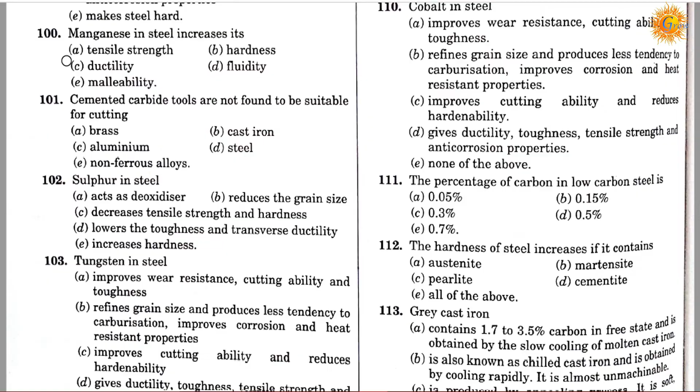Cemented carbide tools are not found to be suitable for cutting. Option A, brass. Option B, cast iron. Option C, aluminium. Option D, steel. Option E, non-ferrous alloys. Correct answer is D. Cemented carbide tools are not found to be suitable for cutting steel.

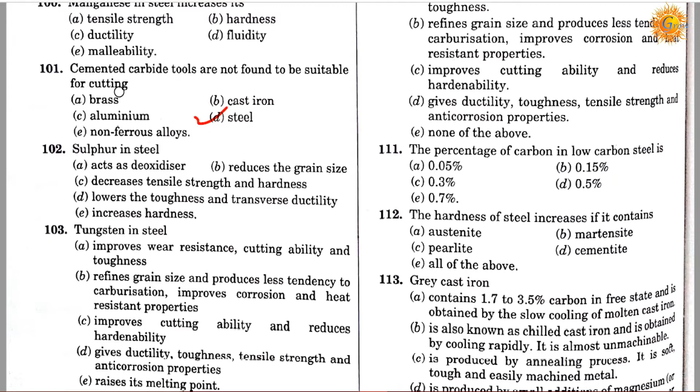Question number 102. Sulfur in steel. Option A acts as a deoxidizer. Option B reduces the grain size. Option C decreases tensile strength and hardness. Option D lowers the toughness and transverse ductility. Option E increases the hardness. Correct answer is D. Sulfur in steel will lower the toughness and transverse ductility.

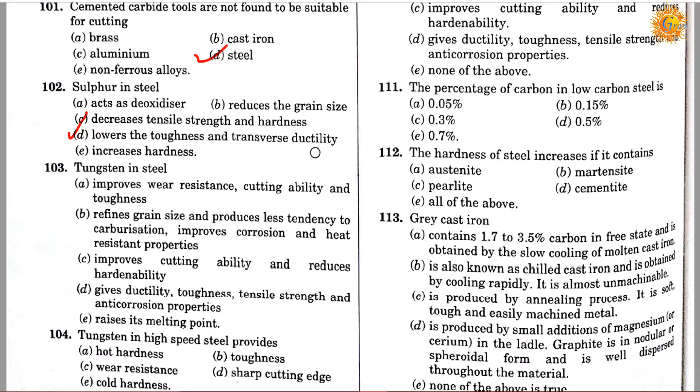Question number 103. Tungsten in steel. Option A improves wear resistance, cutting ability and toughness. Option B refines grain size, reduces tendency to carburization, improves corrosion and heat resistance properties. Option C improves cutting ability and reduces hardenability. Option D gives ductility, toughness, tensile strength and anti-corrosion properties. Option E raises its melting point. Correct answer is B. Tungsten in steel will refine grain size and produce less tendency to carburization, and improves corrosion and heat resistance properties.

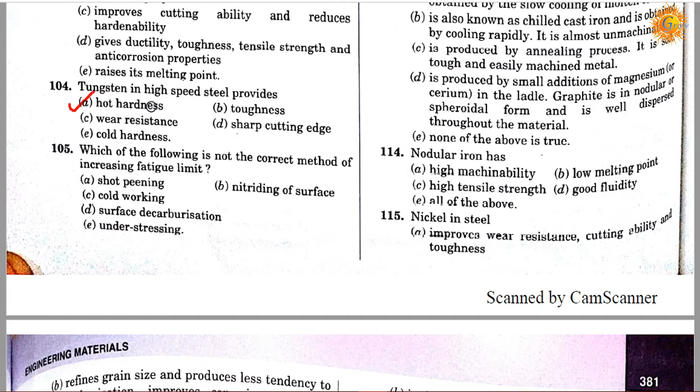Question number 104. Tungsten in high speed steel provides. Option A hot hardness. Option B toughness. Option C wear resistance. Option D sharp cutting edges. Option E cold hardness. Correct answer is A. Tungsten in high speed steel provides hot hardness.

Question number 105. Which of the following is not the correct method of increasing fatigue limit? Option A is shot peening. Option B is nitriding of surface. Option C is cold working. Option D is surface decarburization. Option E is under stressing. Correct answer is D.

It means which of the following is not the correct method to increase the fatigue limit. So surface decarburization is not a good method to increase the fatigue limit.

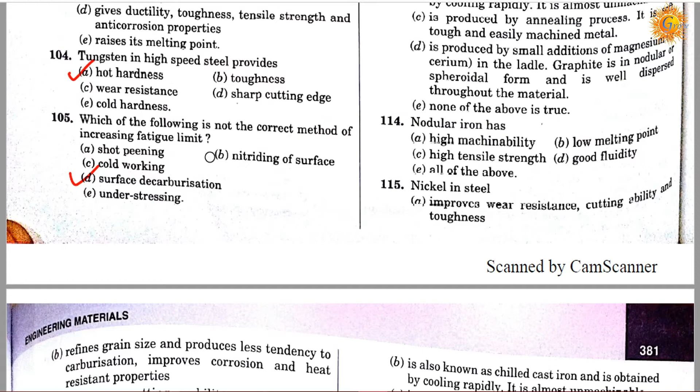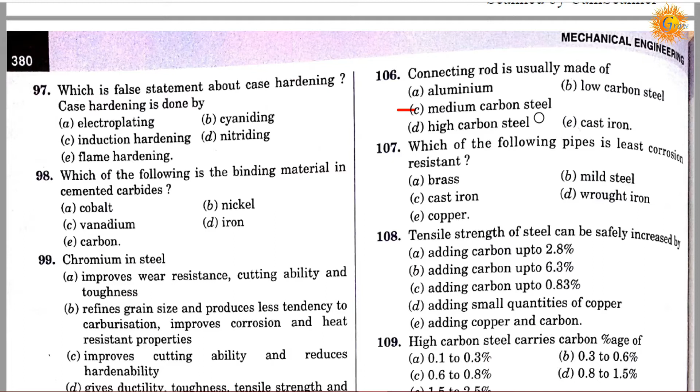Question number 107. Which of the following pipes has the least corrosion resistance? Option A is brass. Option B is mild steel. Option C is cast iron. Option D is wrought iron. Option E is copper. Correct answer is D. Which of the following pipes is the least corrosion resistant? So the wrought iron pipes have the least corrosion resistance.

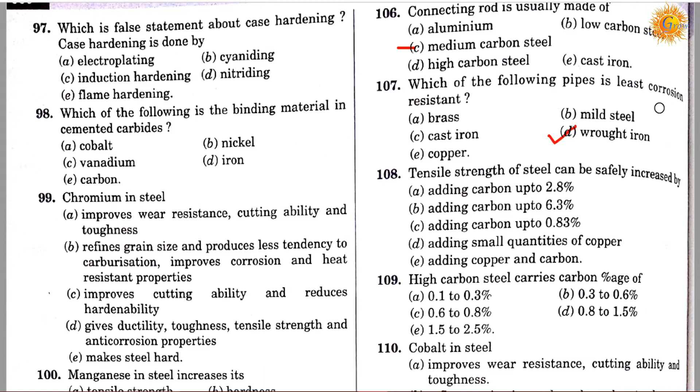Question number 108. Tensile strength of steel can be safely increased by: option A, adding carbon up to 2.8%; option B, adding carbon up to 6.3%; option C, adding carbon up to 0.83%; option D, adding a small quantity of copper; option E, adding copper and carbon. Correct answer is C.

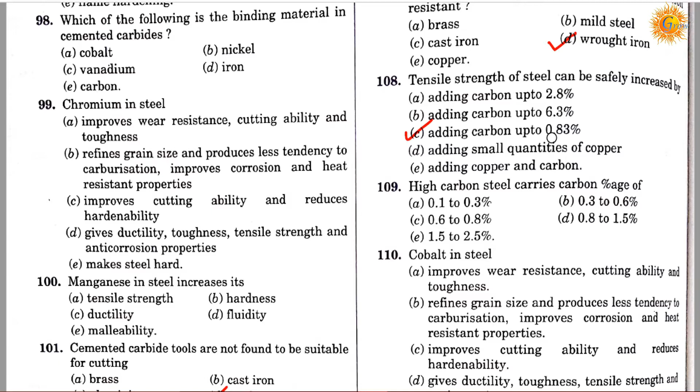Question number 109. High carbon steel carries carbon percentage of: option A, 0.1 to 0.3%; option B, 0.3 to 0.6%; option C, 0.6 to 0.8%; option D, 0.8 to 1.5%; option E, 1.5 to 2.5%. Correct answer is D. High carbon steel carries carbon percentage of 0.8 to 1.5%.

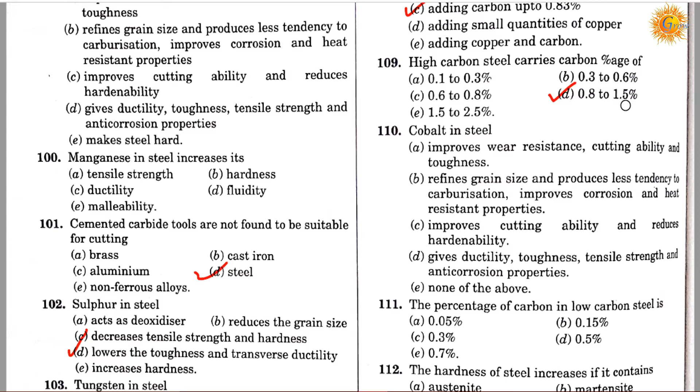Question number 110. Cobalt in steel will: option A, improve wear resistance, cutting ability and toughness; option B, refine grain size and produce less tendency to carburization, improve corrosion and heat resistance properties; option C, improve cutting ability and reduce hardenability; option D, give ductility, toughness, tensile strength and anti-corrosion properties; option E, none of the above. Correct answer is C. Cobalt in steel will improve cutting ability and reduce hardenability.

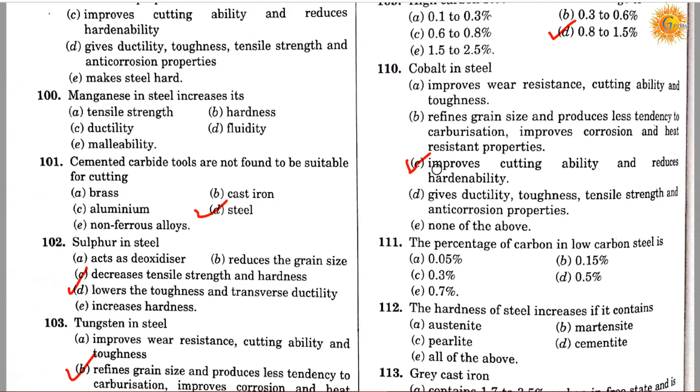Question number 111. The percentage of carbon in low carbon steel is: option A, 0.05%; option B, 0.15%; option C, 0.3%; option D, 0.5%; option E, 0.7%. Correct answer is B. The percentage of carbon in low carbon steel is 0.15%.

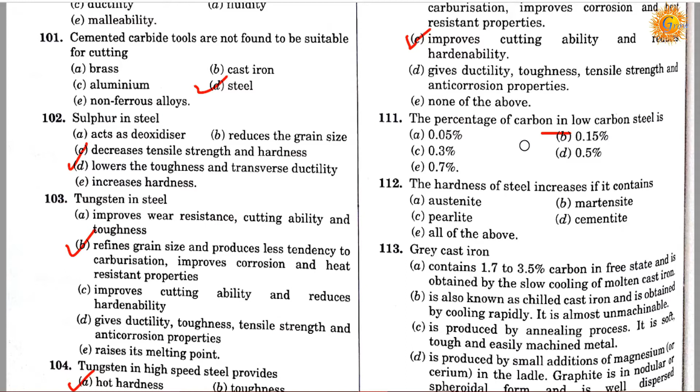Question number 112. The hardness of steel increases if it contains: option A, austenite; option B, martensite; option C, pearlite; option D, cementite; option E, all of the above. Correct answer is B. The hardness of steel increases if it contains martensite.

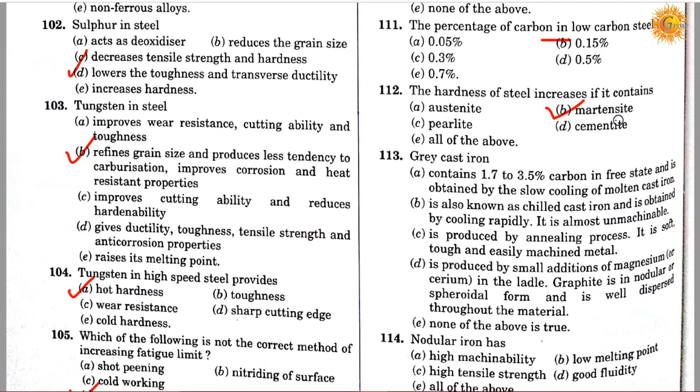Question number 113. Grey cast iron: option A, it contains 1.7 to 3.5% carbon in free state and is obtained by slow cooling of molten cast iron; option B, also known as chilled cast iron, obtained by cooling rapidly, it is almost unmachinable; option C, produced by the annealing process, it is a soft, tough and easily machined metal; option D, produced by small addition of magnesium or cerium in the ladle, and graphite is in nodular or spheroidal form and is well dispersed throughout the material; option E, none of the above is true.

Correct answer is A. Grey cast iron contains 1.7 to 3.5% of carbon in free state and is obtained by the slow cooling of the molten cast iron.

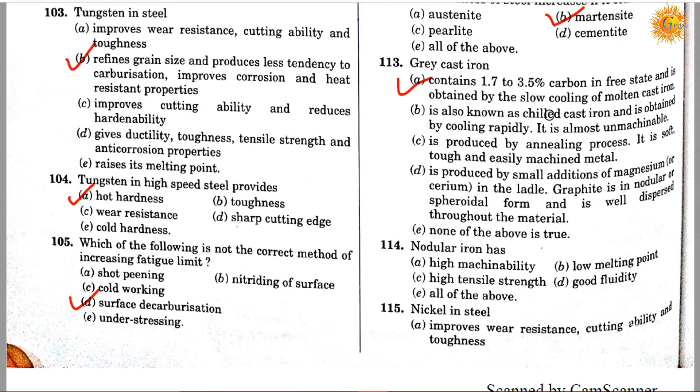Question 114. Nodular iron has: A) high machinability, B) low melting point, C) high tensile strength, D) good fluidity, E) all of the above. Correct answer is E. Nodular iron has high machinability, low melting point, high tensile strength, and good fluidity.

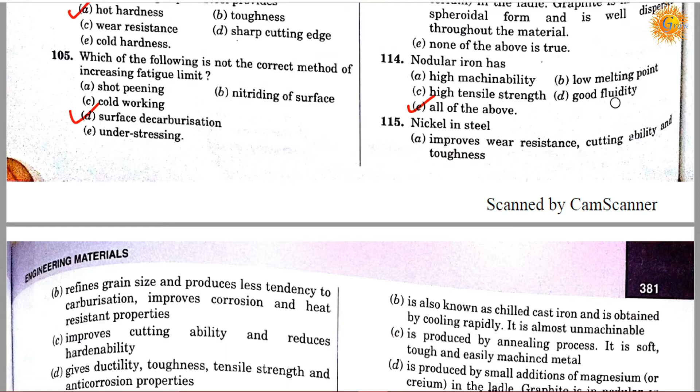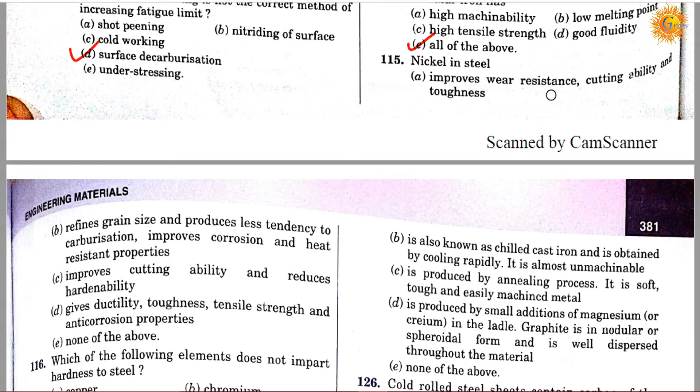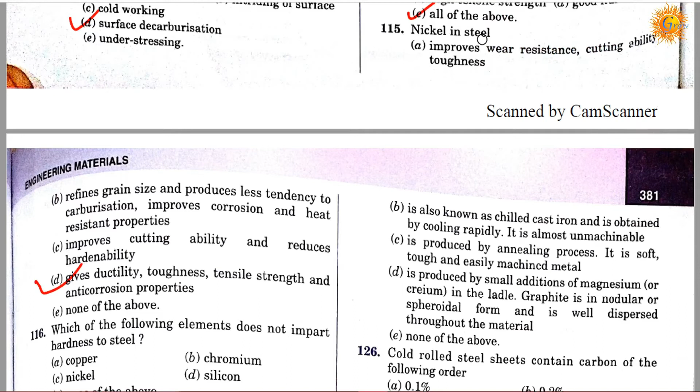Question 115. Nickel in steel will: A) improves wear resistance, cutting ability and toughness. B) refines grain size and produces less tendency to carburization, improves corrosion and heat resistance properties. C) improves cutting ability and reduces hardenability. D) gives ductility, toughness, tensile strength, and anti-corrosion properties. E) none of the above. Correct answer is D. Nickel in steel gives ductility, toughness, tensile strength, and anti-corrosion properties.

Question 116. Which of the following elements does not impart hardness to steel? A) copper, B) chromium, C) nickel, D) silicon, E) none of the above. Correct answer is A, copper, which does not impart hardness to steel.

Question 117. The presence of sulfur in pig iron makes: A) it easily machinable, B) it brittle, C) it hard, D) the casting unsound, E) increases the fluidity. Correct answer is D. The presence of sulfur in pig iron makes the casting unsound.

Question 118. Melting point of iron is: A) 1539 degrees centigrade, B) 1601 degrees centigrade, C) 1489 degrees centigrade, D) 1712 degrees centigrade, E) 1131 degrees centigrade. Correct answer is A. Melting point of iron is 1539 degrees centigrade.

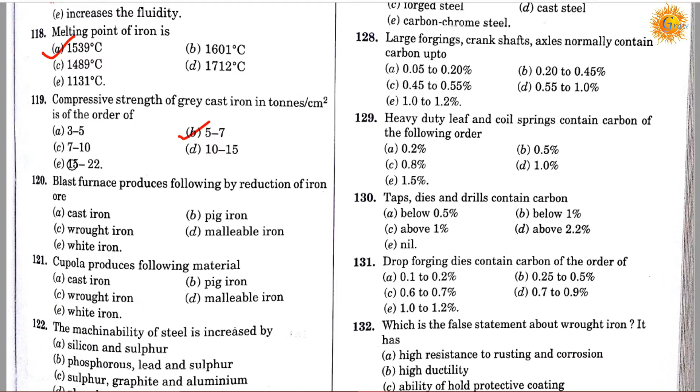Question 120. Blast furnace produces the following by reduction of iron ore: A) cast iron, B) pig iron, C) wrought iron, D) malleable iron, E) white iron. Correct answer is B. Blast furnace produces pig iron by reduction of iron ore.

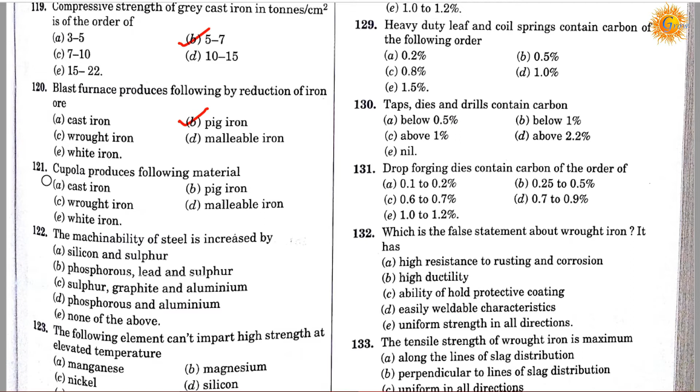Question 121. Does a cupola produce the following material? A) cast iron, B) pig iron, C) wrought iron, D) malleable iron, E) white iron. Correct answer is A, cast iron. Cupola produces cast iron.

Question 122. The machinability of steel is increased by: A) silicon and sulfur, B) phosphorus, lead and sulfur, C) sulfur, graphite and aluminium, D) phosphorus and aluminium, E) none of the above. Correct answer is B. Machinability of steel is increased by phosphorus, lead and sulfur.

Question 123. Which of the following elements can't impart high strength at elevated temperature? A) manganese, B) magnesium, C) nickel, D) silicon, E) none of the above. Correct answer is B. Magnesium can't impart high strength at elevated temperature.

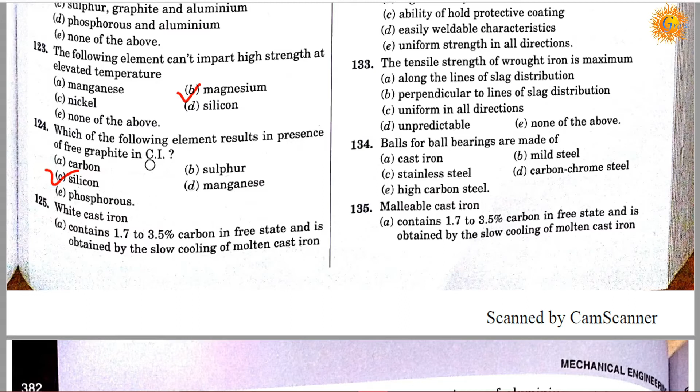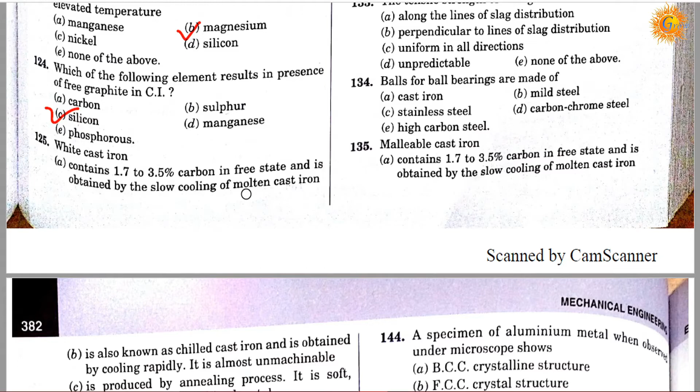Question 125. White cast iron has: A) contains 1.7 to 3.5% of carbon in free state and is obtained by slow cooling of molten cast iron. B) also known as chilled cast iron, obtained by cooling rapidly, it is almost unmachinable. C) produced by annealing process, it is a soft, tough and easily machined metal. D) produced by small addition of magnesium or cerium in the ladle, graphite is in nodular or spheroid form and is well dispersed throughout the material. E) none of the above. Correct answer is B.

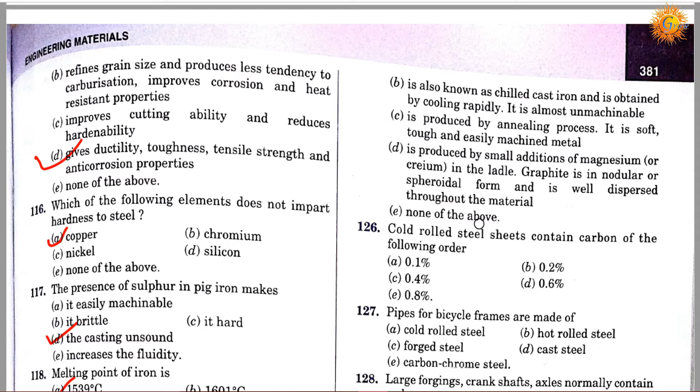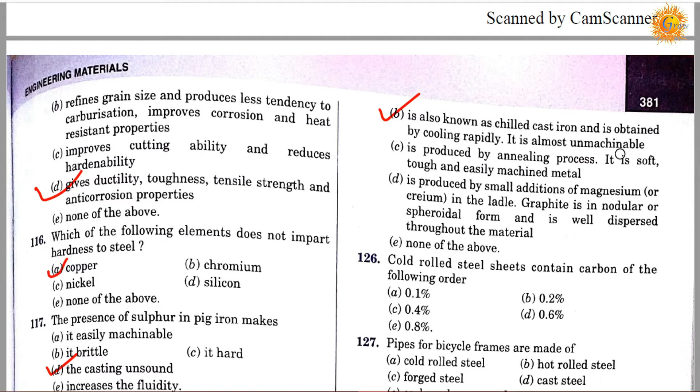So white cast iron is the one which is also known as chilled cast iron, and is obtained by cooling rapidly. It is almost unmachinable.

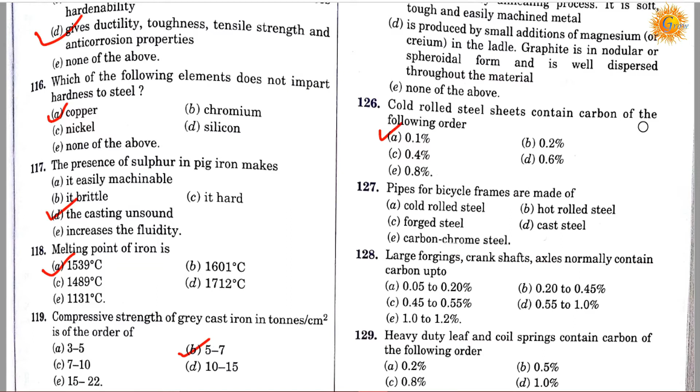Question number 126. Cold rolled steel sheets contain carbon of the following order: option A 0.1%, option B 0.2%, option C 0.4%, option D 0.6%, option E 0.8%. Correct answer is A. Cold rolled steel sheets contain carbon of 0.1%.

Question number 127. Pipes for bicycle frames are made of: option A cold rolled steel, option B hot rolled steel, option C forged steel, option D cast steel, option E carbon chrome steel. Correct answer is A. Pipes for bicycle frames are made of cold rolled steel.

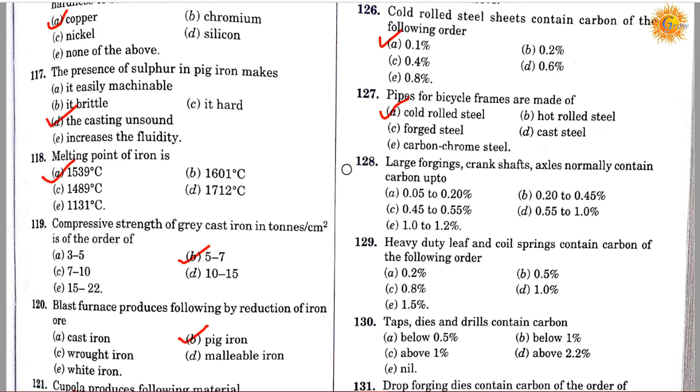Question number 128. Large forgings like crankshafts, axles normally contain carbon up to: option A 0.05 to 0.20%, option B 0.20 to 0.45%, option C 0.45 to 0.55%, option D 0.55 to 1%, option E 1 to 1.2%. Correct answer is C. Large forgings, crankshafts, axles normally contain carbon up to 0.45 to 0.55%.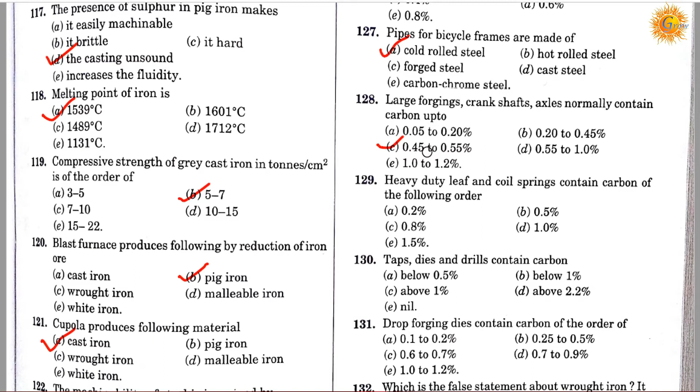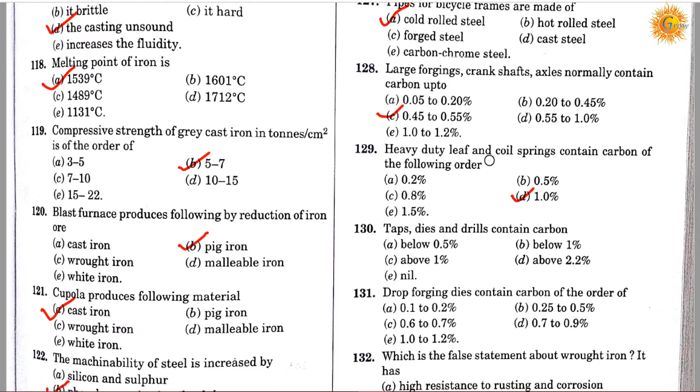Question number 129. Heavy duty leaf and coil springs contain carbon of the following order: option A 0.2%, option B 0.5%, option C 0.8%, option D 1%, option E 1.5%. Correct answer is D, it will be 1%. Heavy duty leaf and coil springs contain carbon of 1%.

Question number 130. Taps, dies and drills contain carbon: option A below 0.5%, option B below 1%, option C above 1%, option D above 2.2%, option E is nil. Correct answer is A, it will be above 1%.

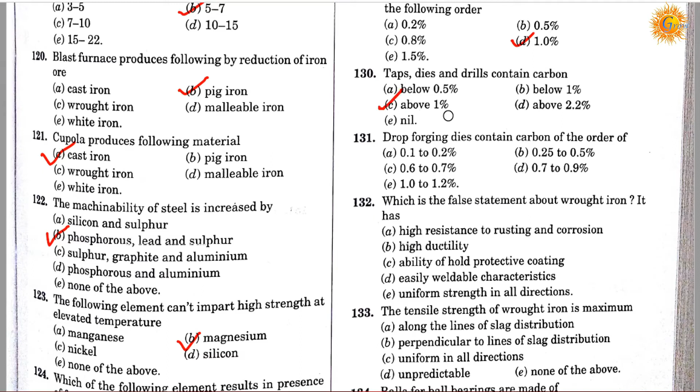Question number 131. The drop forging dies contain carbon of the order of: option A 0.1 to 0.2%, option B 0.25 to 0.5%, option C 0.6 to 0.7%, option D 0.7 to 0.9%, option E 1% to 1.2%. Correct answer is A. Drop forging dies contain carbon of the order of 0.6 to 0.7%.

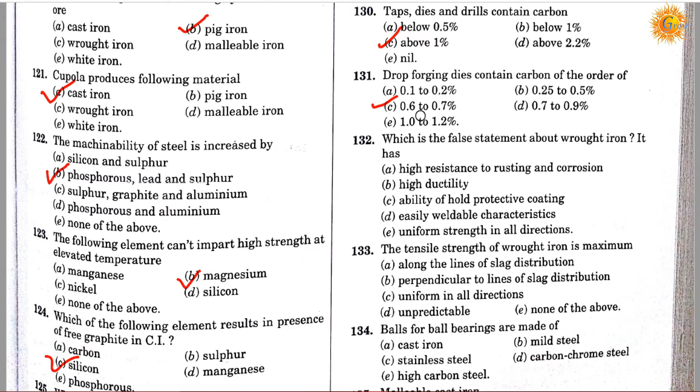Question number 132. Which is the false statement about wrought iron? It has: option A high resistance to rusting and corrosion, option B high ductility, option C the ability to hold protective coatings, option D easily weldable characteristics, and option E uniform strength in all directions. Correct answer is E, which is the false statement about wrought iron. It has uniform strength in all directions - that is the false statement.

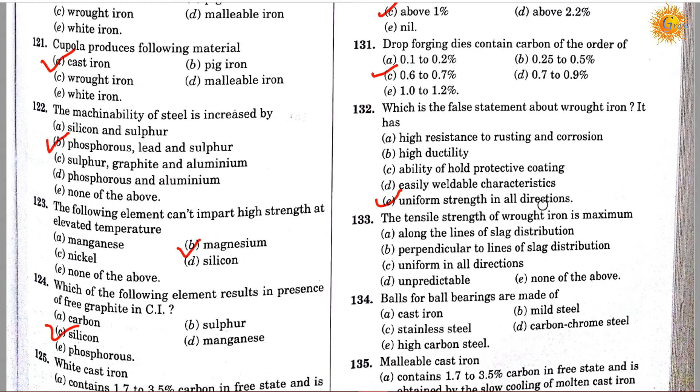Question number 133. The tensile strength of wrought iron is maximum: option A along the lines of slag distribution, option B perpendicular to lines of slag distribution, option C uniform in all directions, option D unpredictable, option E none of the above. Correct answer is A. The tensile strength of wrought iron is maximum along the lines of slag distribution.

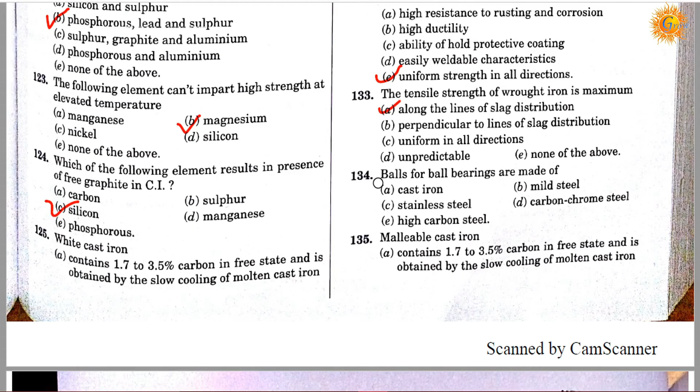Question number 134. Balls for ball bearings are made of: option A cast iron, option B mild steel, option C stainless steel, option D carbon chrome steel, and option E high carbon steel. Correct answer is D, it's made of carbon chrome steel.

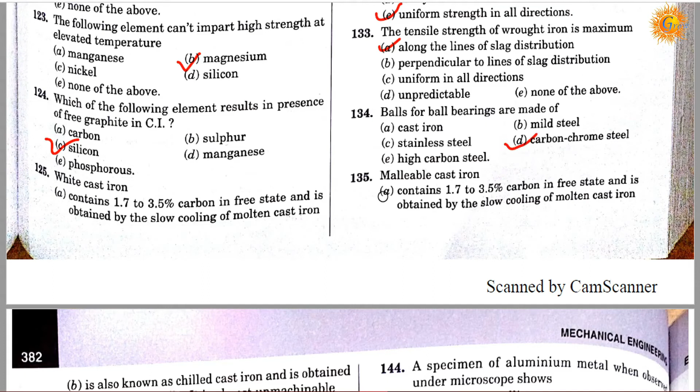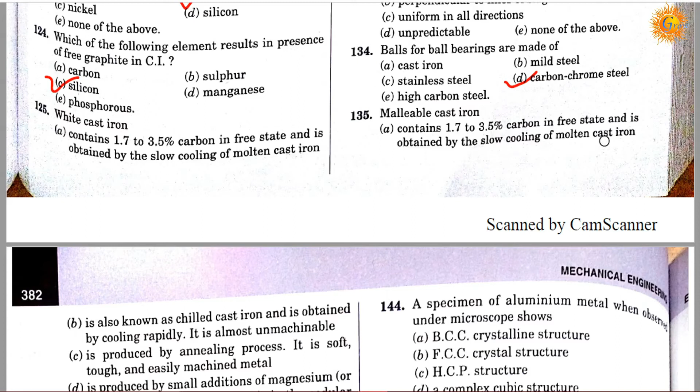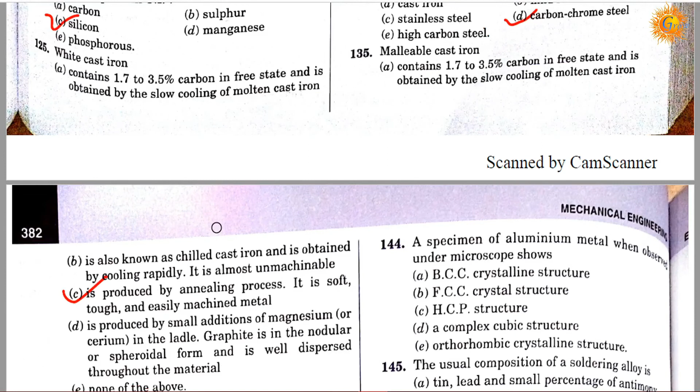Question number 135. Malleable cast iron has: option A contains 1.7 to 3.5% carbon in free state and is obtained by slow cooling of molten cast iron. Option B is also known as chilled cast iron and is obtained by cooling rapidly, it is almost unmachinable. Option C is produced by the annealing process, it is soft, tough, and easily machined metal. Option D is produced by small addition of magnesium or cerium in the ladle, and graphite is in the nodular or spheroidal form, well dispersed throughout the material. Option E is none of the above. Correct answer is A. Malleable cast iron is produced by the annealing process. It is a soft, tough, and easily machined metal.

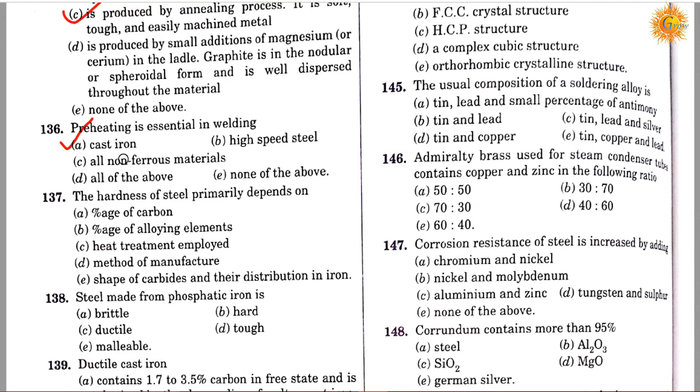Question number 136. Preheating is essential in welding of: option A cast iron, option B high speed steel, option C all non-ferrous materials, option D all of the above, option E none of the above. Correct answer is A. Preheating is essential in welding of cast iron.

Question number 137. The hardness of steel primarily depends on: option A the percentage of carbon, option B percentage of alloying elements, option C heat treatment employed, option D method of manufacture, and option E the shape of carbides and their distribution in iron. Correct answer is E. The hardness of steel primarily depends on the shape of carbides and their distribution in iron.

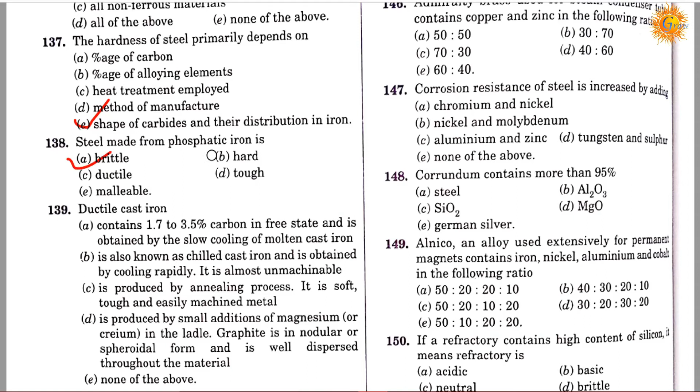Question number 138. Steel made from phosphatic iron is: option A brittle, option B hard, option C ductile, option D tough, option E malleable. Correct answer is A. Steel made from phosphatic iron is brittle.

Question number 139.

Ductile cast iron contains 1.7 to 3.5% carbon in free state and is obtained by slow cooling of molten cast iron. Option B is also known as chilled cast iron, obtained by rapid cooling and is almost unmachinable. Option C is produced by annealing and is a soft, tough, easily machined metal. Option D is produced by a small addition of magnesium or cerium in the ladle, where graphite is in nodular or spheroidal form and is well dispersed throughout the material. Option E is none of the above.

Correct answer is D. Ductile cast iron has a small addition of magnesium or cerium in the ladle, and graphite is in nodular or spheroid form and is well dispersed throughout the material.

Question number 140. Brass contains: option A, 70% copper and 30% zinc; option B, 90% copper and 10% tin; option C, 85 to 92% copper and rest tin with little lead and nickel; option D, 70 to 75% copper and rest tin; option E, 70% copper and 30% tin. Correct answer is A. Brass contains 70% copper and 30% zinc.

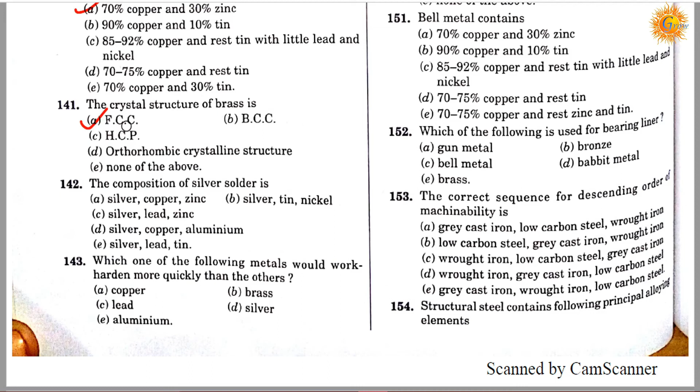Question number 142. The composition of silver solder is: option A, silver, copper, zinc; option B, silver, tin, nickel; option C, silver, lead, zinc; option D, silver, copper, aluminium; option E, silver, lead and tin. Correct answer is A. Composition of silver solder is silver, copper and zinc.

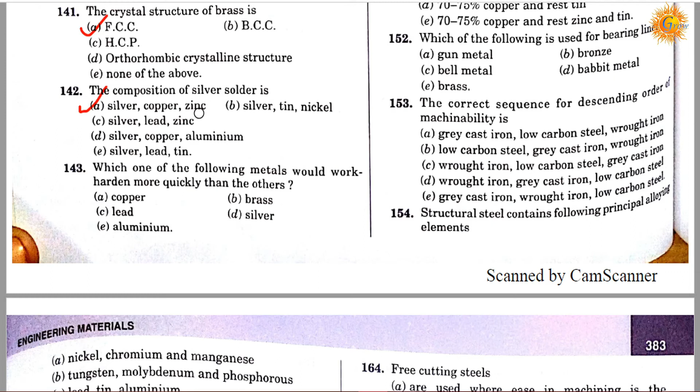Question number 143. Which one of the following metals would work-harden more quickly than the others? Option A is copper, option B is brass, option C is lead, option D is silver, and option E is aluminium. Correct answer is B. Brass is the one of the following metals that would harden more quickly than the others.

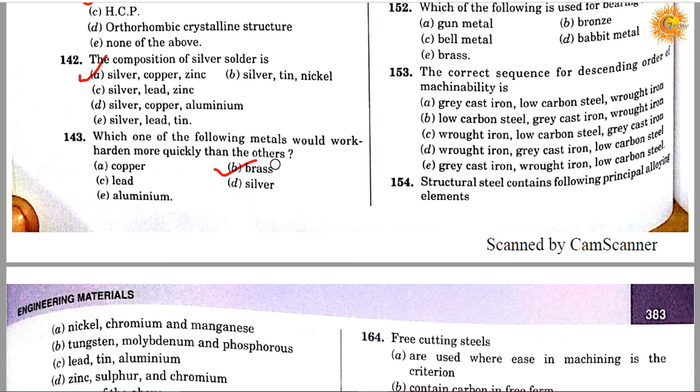Question number 144. A specimen of aluminium metal when observed under the microscope shows: option A, a BCC crystalline structure; option B, a FCC crystalline structure; option C, a HCP structure; option D, a complex cubic structure; option E, an orthorhombic crystalline structure. Correct answer is B. It will be FCC crystal structure when a specimen of aluminium metal is observed under the microscope.

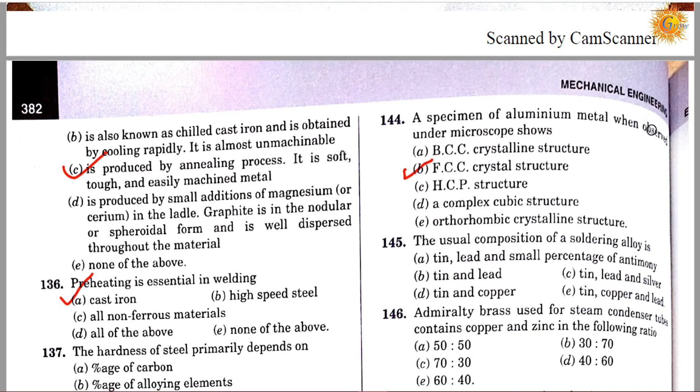Question number 145. The usual composition of a soldering alloy is: option A, tin, lead and a small percentage of antimony; option B, tin and lead; option C, tin, lead and silver; option D, tin and copper; option E, tin, copper and lead. Correct answer is A. Usual composition of soldering alloy is tin, lead and a small percentage of antimony.

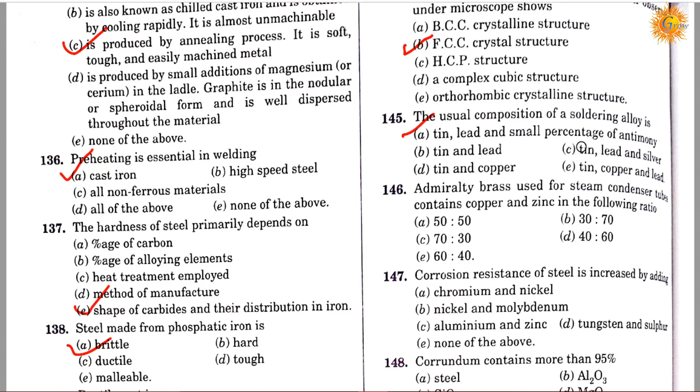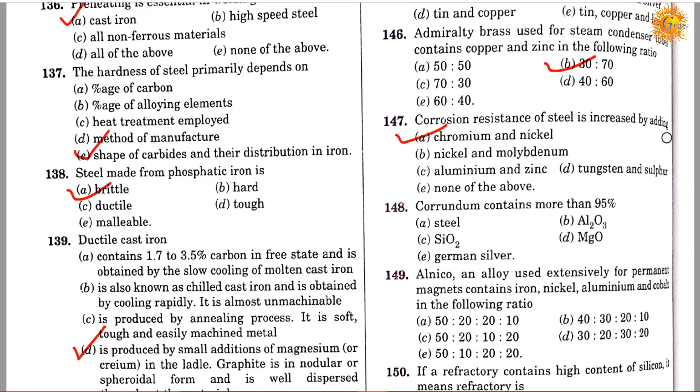Question number 147. Corrosion resistance of steel is increased by adding: option A, chromium and nickel; option B, nickel and molybdenum; option C, aluminium and zinc; option D, tungsten and sulfur; option E, none of the above. Correct answer is A. Corrosion resistance of steel is increased by adding chromium and nickel.

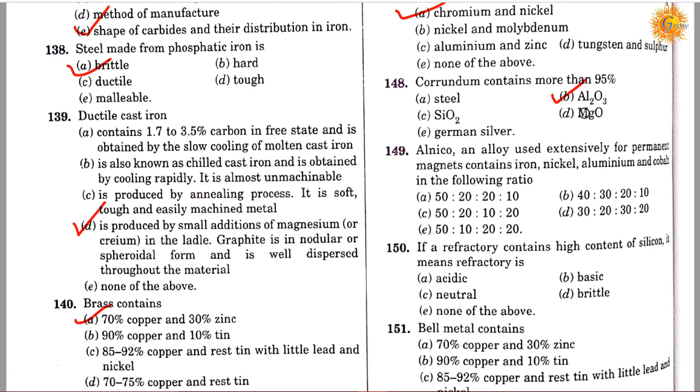Question number 148. Corundum contains more than 95% of: option A, steel; option B, Al2O3; option C, SiO2; option D, MgO; option E, German silver. Correct answer is B. Corundum contains more than 95% Al2O3.

Question number 149. Alnico, an alloy used extensively for permanent magnets, contains iron, nickel, aluminium and cobalt in the following ratio: option A, 50:20:20:10; option B, 40:30:20:10; option C, 50:20:10:20; option D, 30:20:30:20; option E, 50:10:20:20. Correct answer is A. Alnico, an alloy used extensively for permanent magnets, contains iron 50%, nickel 20%, aluminium 20% and cobalt 10%.

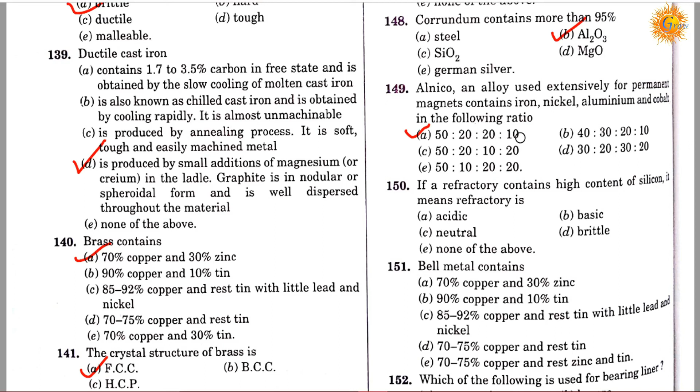Question number 150. If a refractory contains a high content of silicon, it means the refractory is: option A, acidic; option B, basic; option C, neutral; option D, brittle; option E, none of the above. Correct answer is A. If a refractory contains a high content of silicon, it means the refractory is acidic.